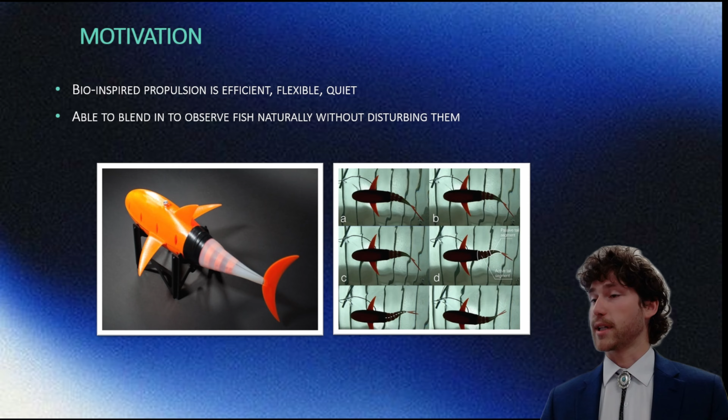I'm a senior in ocean engineering at the University of Southern Mississippi, and my senior project was optimizing thrust of a biomechanical fish. The motivation was, unlike traditional propeller-driven systems, bio-inspired propulsion can reduce noise, improve efficiency at smaller scales, and better replicate natural aquatic locomotion. This is useful for observing fish naturally without disturbing them.

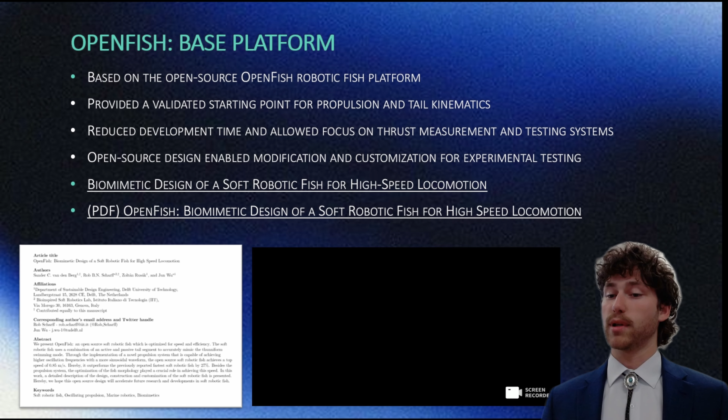The OpenFish project demonstrated realistic thunniform swimming behavior, making it an ideal baseline platform for evaluating thrust generation and tail performance. This video demonstrates the original OpenFish swimming behavior and highlights the realistic body and tail motion that inspired this project.

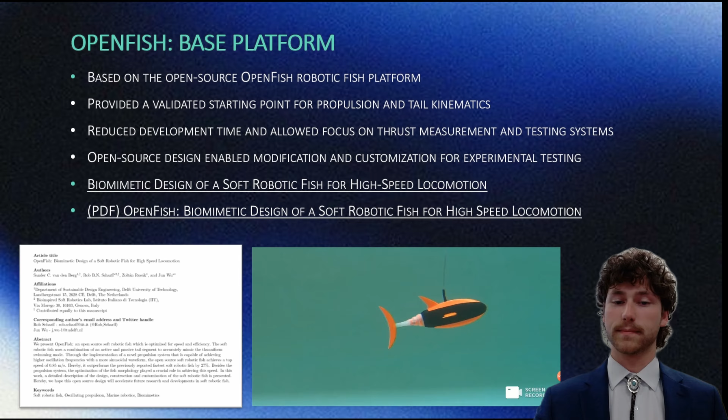And this is a clip of the paper on the left side of the screen.

The problem was, how do we accurately measure small and steady thrust forces produced by a flexible robotic fishtail? The primary challenge was separating very small thrust forces from noise, vibration, and mechanical interference while keeping the system simple and repeatable, as well as low cost, and allowing modular testing of multiple tail configurations and RPM conditions.

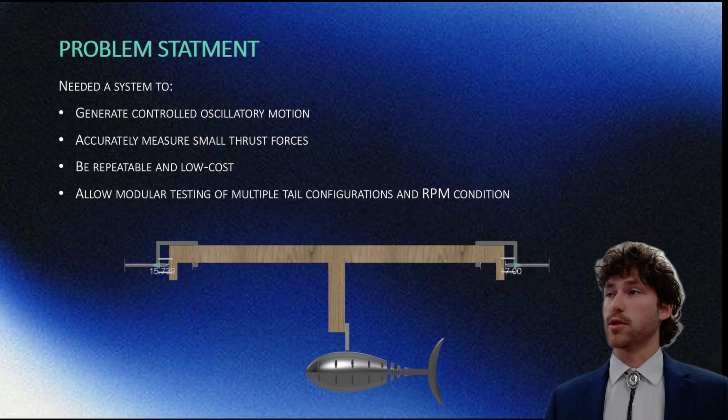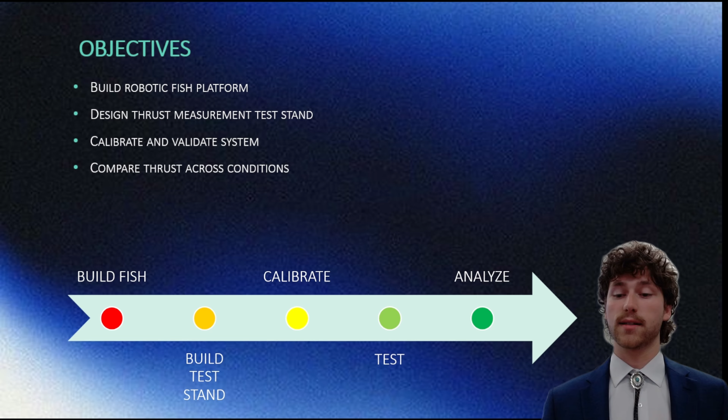The objective and overall goal was to develop a low-cost experimental platform by designing a thrust measurement test stand capable of quantitatively evaluating robotic fish propulsion performance and calibrating both systems to work in harmony with each other, then using them to run extensive testing on caudal fin configurations and RPM conditions, analyzing this data to see which performed best and created the most thrust.

Those two systems were the thrust measurement rig, which was designed to keep the fish stationary while measuring force output, and went through multiple design iterations to improve simplicity and accuracy, as well as the robotic fish, the propulsion device used to generate the thrust, tested under different RPMs and different caudal fin configurations. The integration of these two systems allowed controlled propulsion testing while directly measuring generated thrust forces.

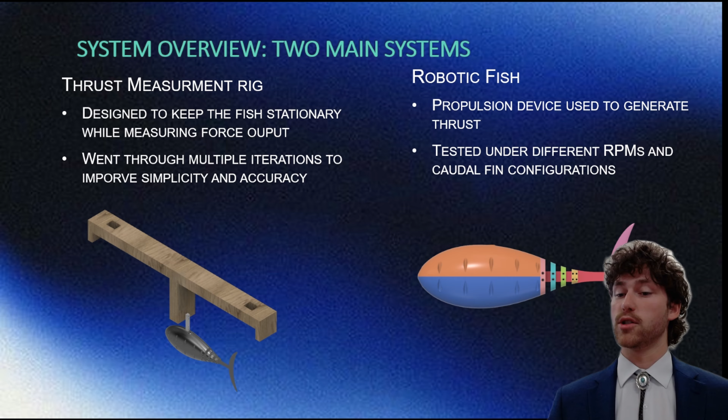For the rig iterations, the first one on the far left here is a sliding cart pushing against two compressive load cells. It would have a lot of moving parts and complexities. The second one in the center was the first vertical hanging configuration, which allowed easier access to the fish and a smaller tank. But the tail proximity to the bottom would have created undesirable wave reflections and interference.

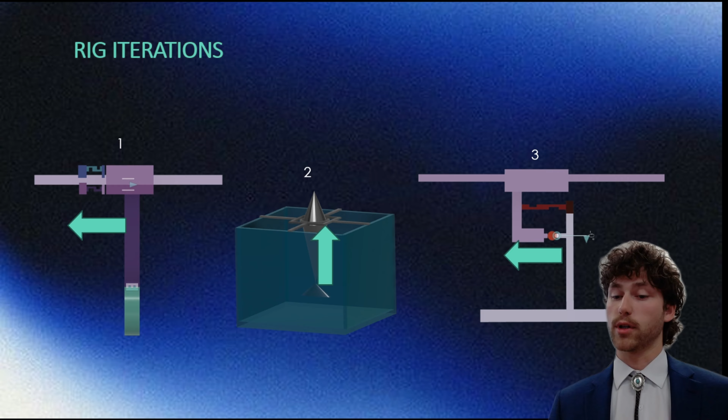Iteration 3 was a horizontal rig using a pivot bearing and a tensile load cell. This would function successfully, but introduced more unnecessary moving components. These early iterations helped identify major potential sources of measurement error, including unwanted moments, alignment issues, and mechanical complexities.

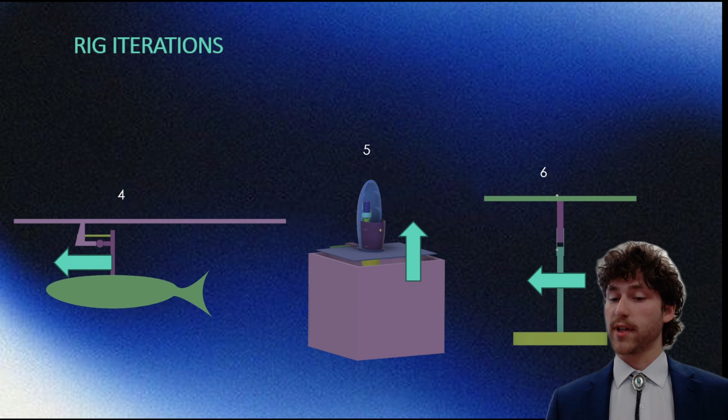Iteration 6 was the closest design to the final rig configuration. It used a moment arm connected to the load cell to convert bending into measurable force. Through iterative CAD designs, the design evolved towards minimizing moving parts and reducing off-axis loading effects.

For the final rig design, we used a simple wooden beam mounted across the top of the tank, and the fish was held stationary beneath the beam using a flat steel moment arm which connected the fish to the load cell. The load cell and the fish were both mounted using L brackets. The main advantage of this was a significantly simpler and more repeatable system, as well as cheaper. The main challenge with committing to this iteration was that the fish required complete waterproof sealing due to its full submersion. The final rig provided the best balance between simplicity, rigidity, accessibility, and measurement consistency.

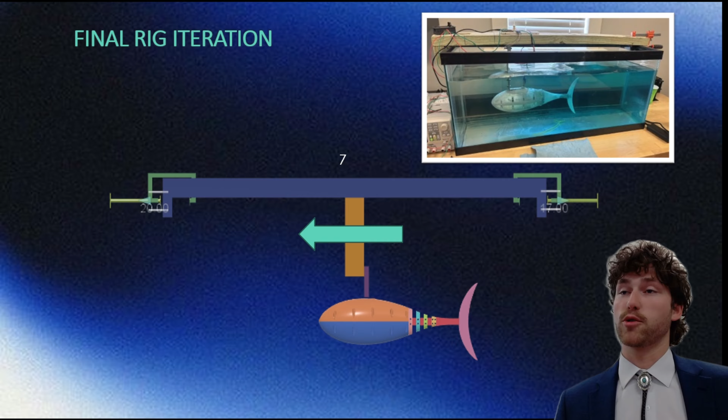As you can see in the photo, the load cell is on the top between the beam and the water, and the fish's caudal fin is fully submerged to have the least disturbance to the surface. The fish is also moved forward to not create unwanted reflections from the rear of the tank.

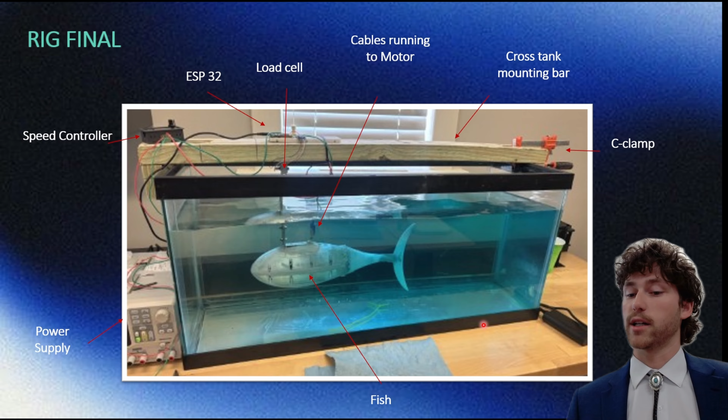The cables run from the power supply up into the speed controller and then down into the head of the fish to control the fish's RPM. The ESP32 communicated through a cable here to a laptop off screen. This final configuration successfully reduced unnecessary mechanical interference while maintaining accurate force transmissions to the load cell.

The other system is the fish, the robotic fish platform.

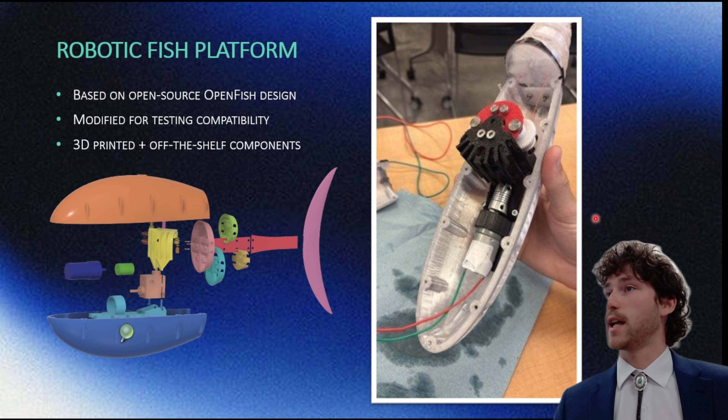For the propulsion system, it was a motor-driven gear system with cable-driven tail actuation that produced lateral oscillations. The figure shows the original CAD and the updated design in the photo here to show the differences that were made. The motor outputted into the shaft coupling, and then into a 90-degree gearbox with a 20-tooth gear at the top of that drove the two 50-tooth gears on each side here at the top photo.

With this, it pulled the cables that you can kind of see here in orange down the length of the tail, creating tail oscillations that generated forward thrust. This cable-driven system allowed compact internal packaging while producing realistic fish-like tail motion.

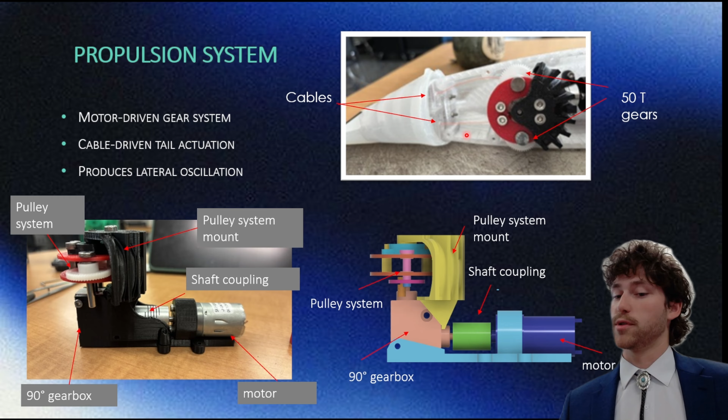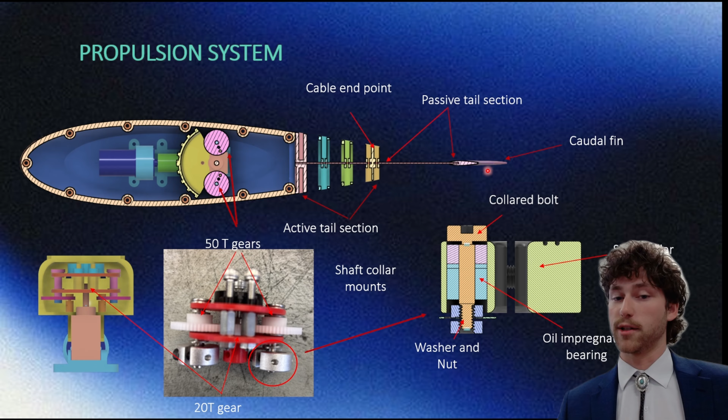The passive tail flexibility is critical for generating forward thrust. The water is redirected backwards at an angle to propel the fish forward, and the proper deflection produces realistic thunniform swimming motion. Thunniform locomotion is the minimization of head motion while maximizing tail-driven propulsion. While my fish is not free swimming, having the least head movement while attached was optimal for this study. The tail must balance the flexibility for bending and the stiffness for force transfer.

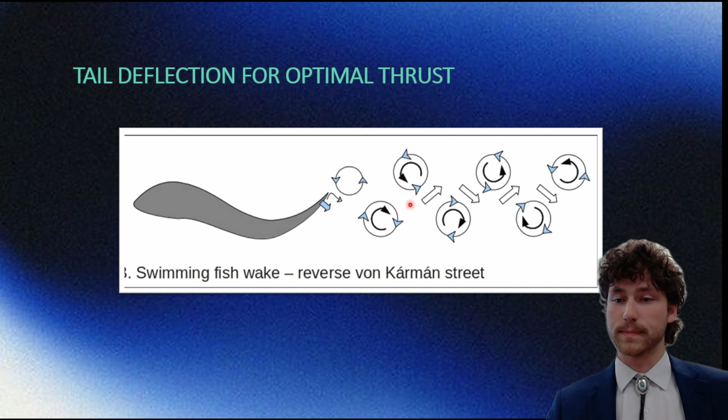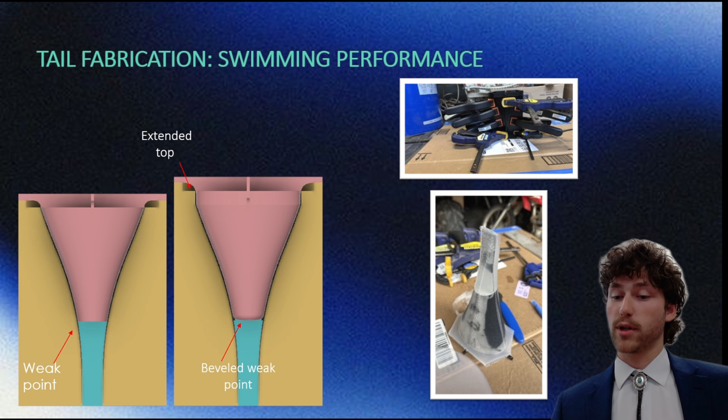That's because the top was increased by 10 millimeters to increase the surface area being sealed to the body of the fish. This would prevent pulls and rips from happening. The iterative fabrication improved the structural durability and the seal on the fish. Photo 1 shows additional silicone being applied to reinforce the weak point on the silicone tail version 1.

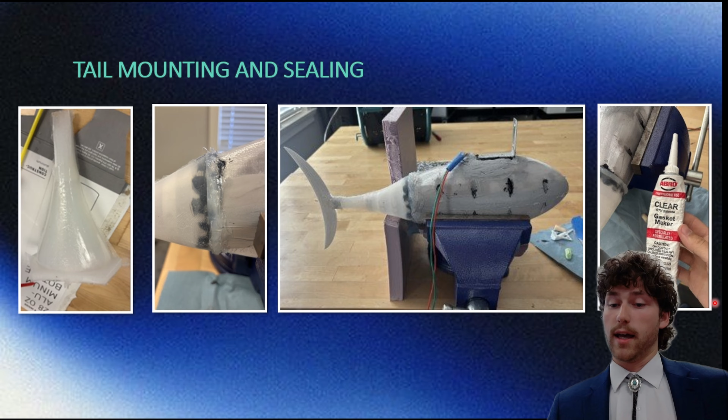And through experimentation and efforts to seal the tail onto the fish, I discovered liquid electrical tape, initially used for waterproofing, the black here in the second photo, did not adhere to the silicone tail, but did fill the gaps in the fish's body, as well as Flex Seal being used to seal the main body, the midline, and the wire entry locations, as well as the L bracket holes on the main body. The final successful seal between the silicone tail and the PETG body was achieved using an RTV gasket maker. Reliable waterproofing was essential because any leakage could damage electronics and invalidate long thrust testing.

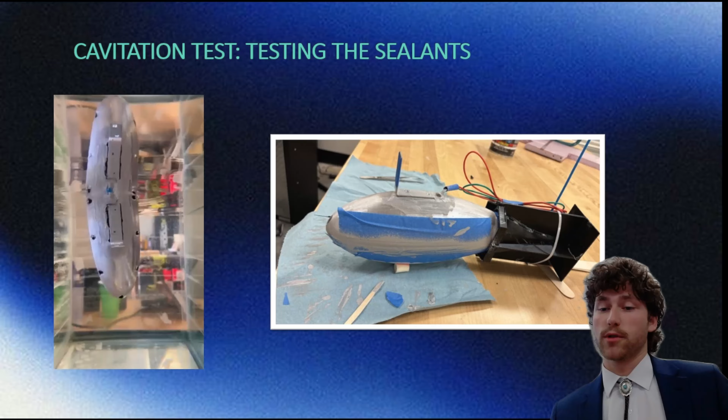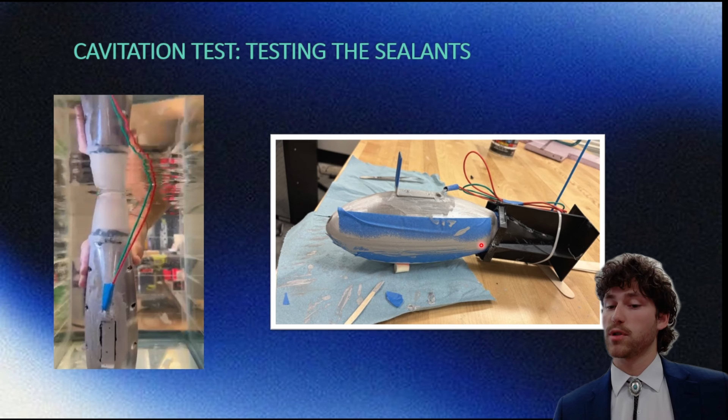After this, testing the fish in fully submerged water to see if it leaked or not. Observing for escaping air bubbles, which would indicate leaks. The successful test confirmed waterproofing integrity before thrust experiments. And on the right is a photo of the drying process for the Flex Seal on the main body of the fish. This verification step ensured the propulsion system could safely operate underwater during these testing sessions.

For the thrust measurement system, as the fish swims in the direction of the arrow against the load cell, it creates a bending moment in this section with a hole here. The Wheatstone bridge crosses the section, which is this, and the bending moment results in elongating or compressing these resistors. This creates a change in voltage across the Wheatstone bridge, which is proportional to the force being applied.

This is an output in analog, and then goes to the HX711, which amplifies and converts the data into digital, and it goes to the ESP32, which then runs the uploaded code of conversions and transfers the data to the serial plotter. From the serial plotter, we watch live data being collected, and it is recorded and then exported into MATLAB. From MATLAB, we process the raw force time data, then I use it to generate the plots and performance comparisons between testing sessions. These measurement systems enabled continuous real-time thrust analysis during the swimming experiments.

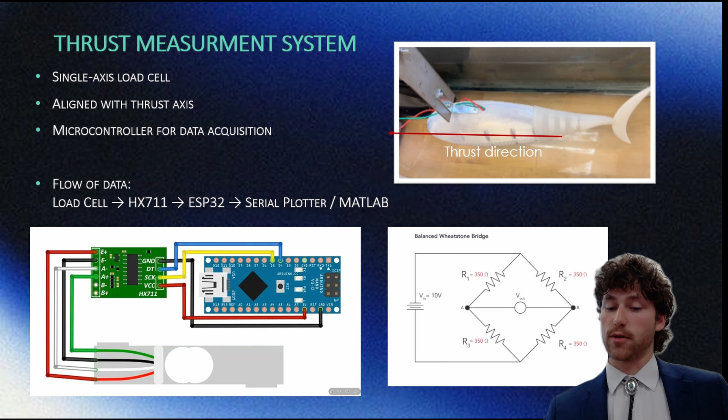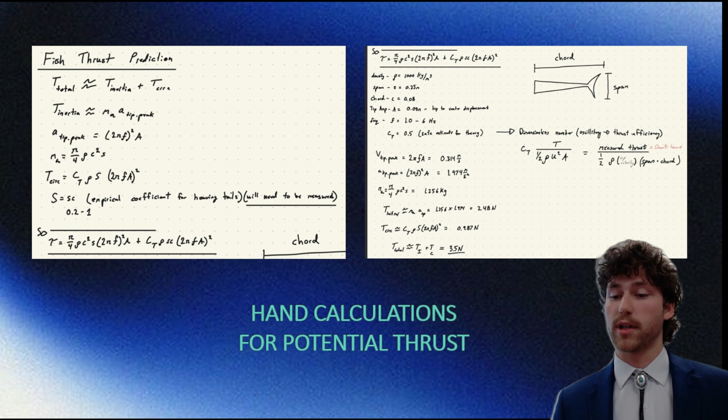Without the calibration, this data is meaningless. So I took the open source program that gave an output of grams from the load cell and added in the conversion to force, as well as adding in time steps to accurately show the force over time and be able to conduct swimming tests for equal lengths per test. The graph on the bottom right shows an example of force over time for a quick hand pressure test on the load cell to prove the code outputted in the desired manner.

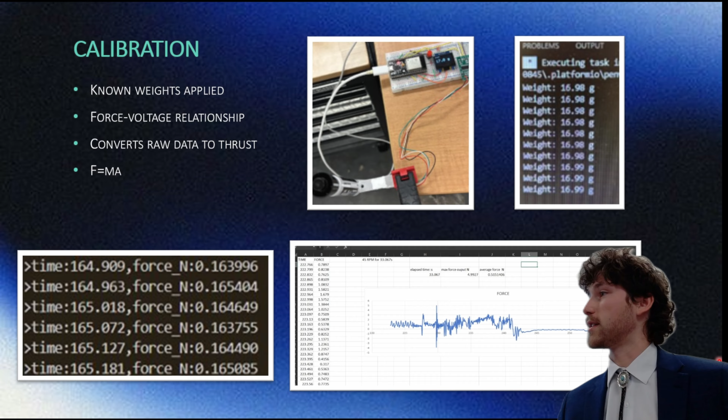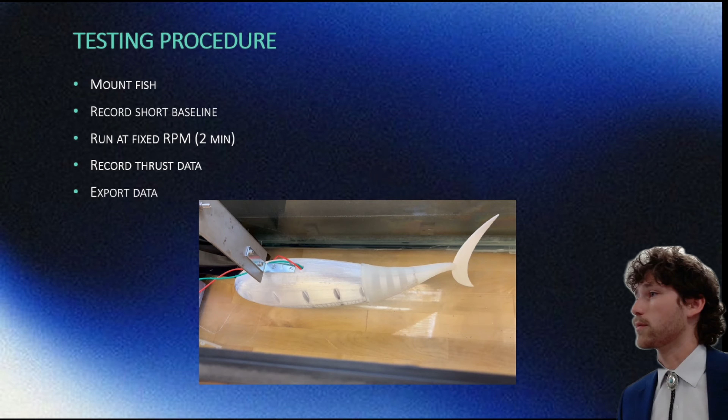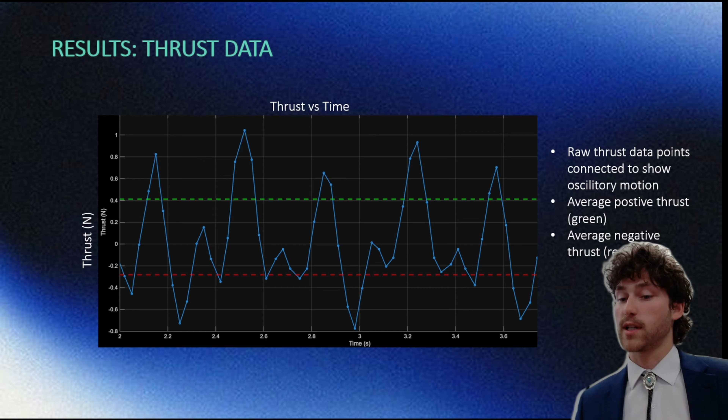This graph is a raw thrust signal plotted over time and connected to show the oscillatory force behavior. The green line is the positive average thrust, and the red line the negative average thrust, included for comparison. The periodic thrust pattern confirms successful transfer of oscillatory tail motion into measurable hydrodynamic force generation. And as I'll show you in the next slide, this particular graph is highlighting an inefficiency in force propulsion.

The caudal fin 1 test, pictured in the top right in the CAD version, was done at 450 RPM, producing strong forward strokes of about 1.2 newtons, but it also spends significant time in recovery and backflow motion. The close proximity between the positive average and the negative average thrust values suggests this tail configuration was not highly efficient at producing sustained forward propulsion.

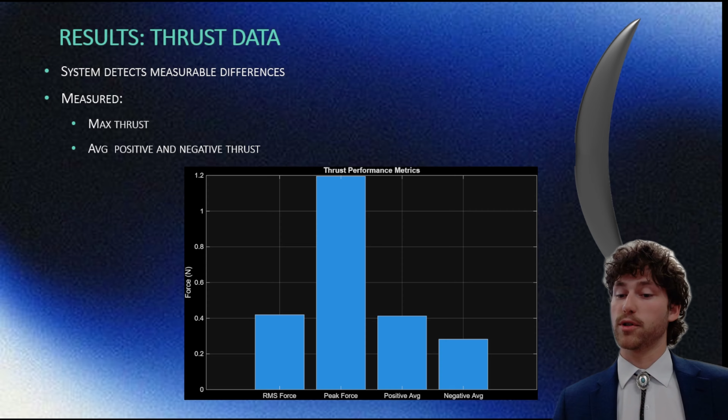Unfortunately, due to load cell failure, full quantitative comparison between all fins and RPM conditions could not be completed. However, qualitative flow visualization and tail motion observations still provided valuable insight into propulsion behavior. The direction the water is pushed is just as important as the amount of tail movement.

The initial fin design primarily pushed water side to side, and the larger fin generated greater drag on the passive tail section, creating an angle of attack that was more appropriate, and this increased the forward thrust movement. The larger caudal fin produced more realistic tail motion and redirected flow further behind the fish rather than primarily left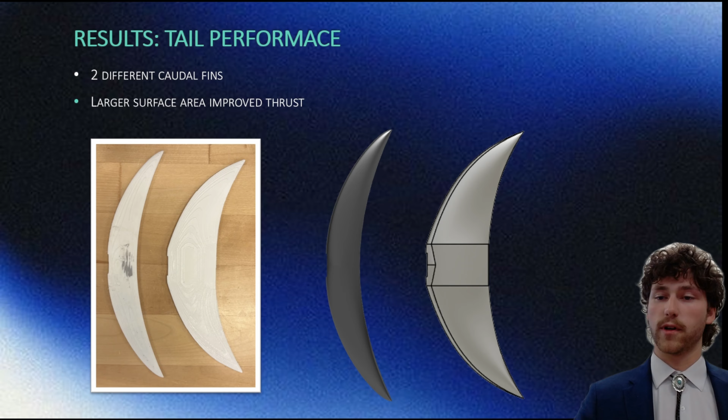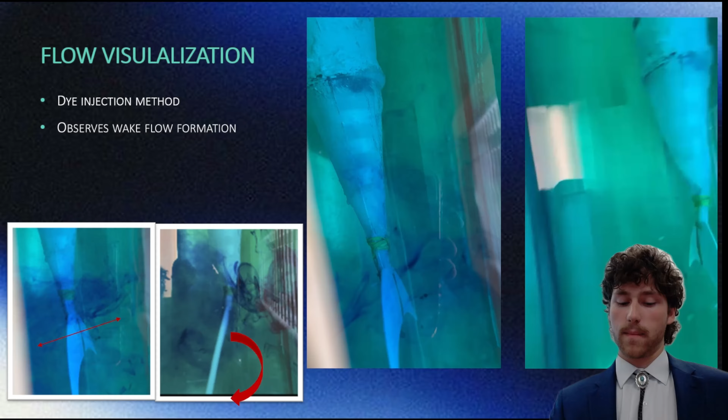This was the dye injection method used to observe the wake flow formation. The original fin configuration, dye primarily dispersed left and right, indicates energy loss to lateral flow rather than forward propulsion. And in the right video, the larger caudal fin configuration increases rear tail deflection, and the dye is pushed further

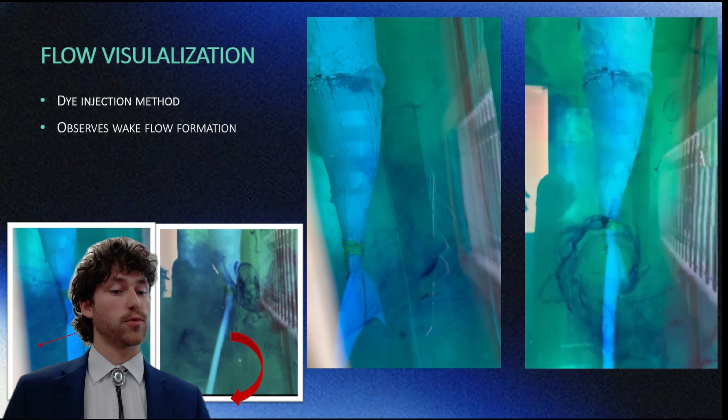downstream behind the fish. The flow visualization clearly demonstrates how tail geometry changes altered wake direction and likely improved the thrust efficiency. The larger fin produced a more concentrated downstream wake, indicating better momentum transfer and desired thrust direction.

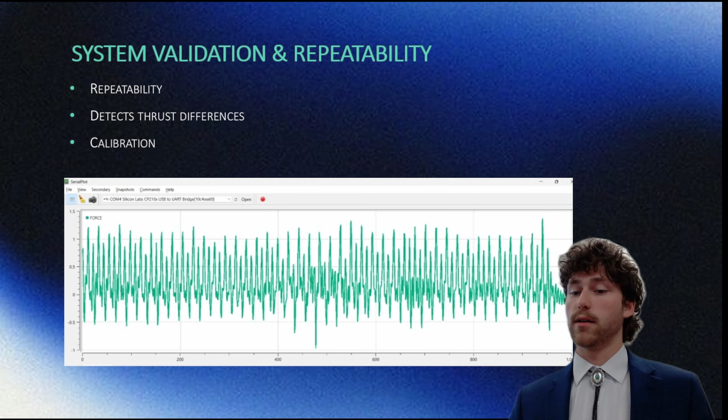As far as system validation and repeatability, although the data set was limited, the system successfully validated the ability to measure small oscillatory thrust forces from a flexible robotic fish platform, showing repeated peaks, oscillatory frequency, and a stable baseline noise in each of the iterations completed until a certain point.

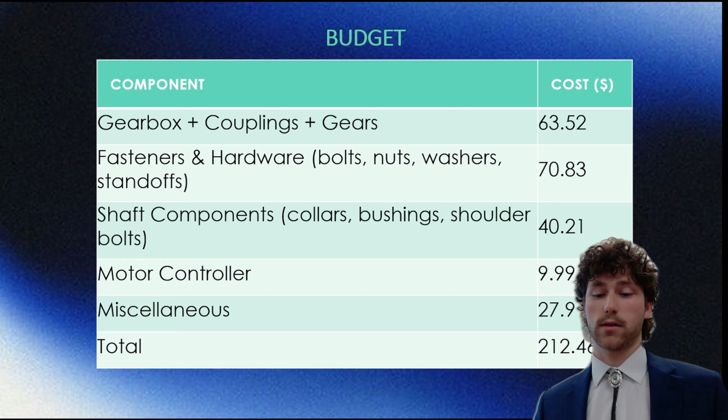For my budget, it was provided through the Ocean Engineering Laboratory. Thank you, Dr. Nunes. No outside or DCRA funding was obtained for this project, and the budget constraints influenced material selection and testing scope. Despite this limited funding, the project successfully produced a functional experimental propulsion testing platform at a relatively low cost.

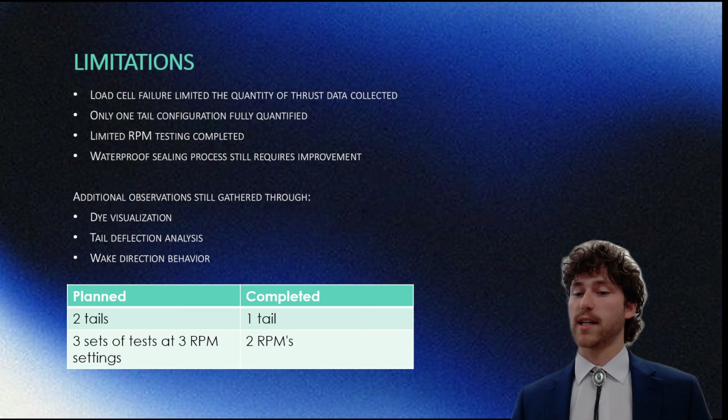The limitations: the load cell failure limited the quantity of thrust data collected. Only 1 tail configuration was fully quantified, and limited RPM testing was completed. The waterproof sealing process still requires some improvement, but some of the additional observations still gathered were the dye visualization, tail deflection analysis, and wake direction behavior. Although the numerical data set was limited, qualitative testing still provided important insight into propulsion performance and tail behavior.

As far as what can be improved, the deflection of the caudal fin to achieve thrust in the X direction, reducing noise and vibration in the measurements, and improving the alignment of the load path. Using a higher precision load cell, or one that doesn't break, and better waterproofing for future aquatic testing, as well as using some rust-resistant materials for the testing rig.

Future iterations should focus on improving both hydrodynamic efficiency and measurement precision simultaneously. Reducing mechanical noise and off-axis loading would likely improve the consistency of collected data.

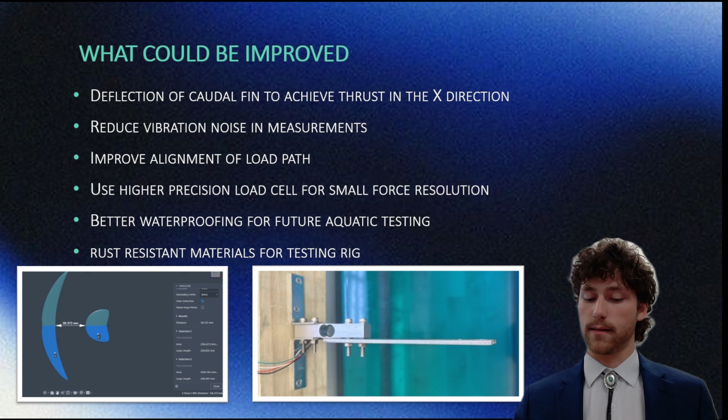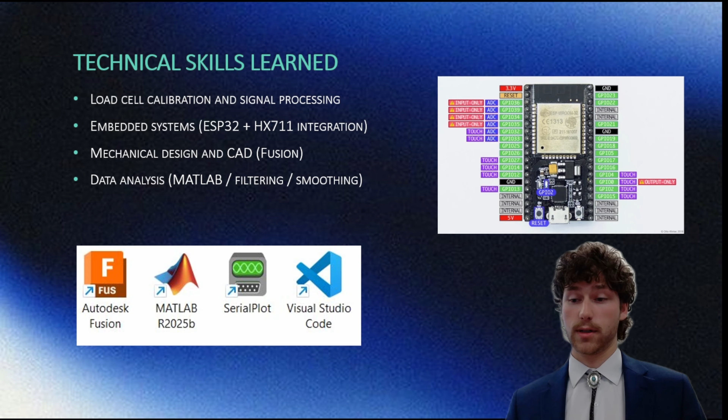For technical skills learned, I worked directly with load cells and calibrating programs, integrating with an ESP32 microcontroller and an HX711 amplifier for real-time data acquisition. I repeatedly redesigned components in Fusion based on testing feedback, using a serial plotter for raw data collection and MATLAB to process, smooth, and compare thrust data. This project combined mechanical, electrical, and software engineering into a single experimental testing platform.

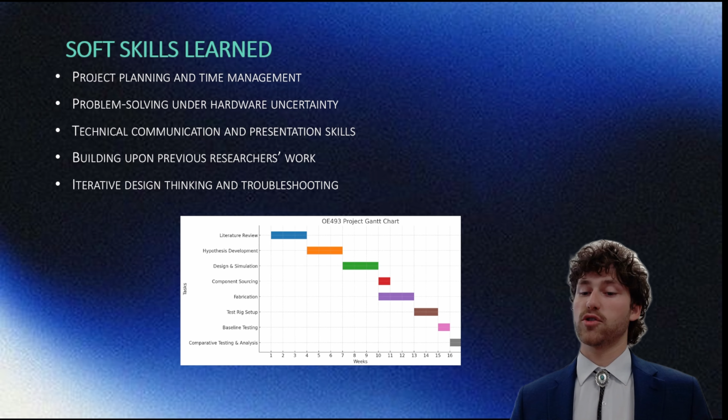For soft skills learned, seeing as we presented every week for at least 30 minutes, some of us for longer, I learned the importance of communicating technical systems clearly, both visually and verbally, especially when explaining complex mechanisms like the propulsion and thrust measurement system. This project reinforced how engineering research is often iterative, where each version builds off of previous work and gradually improves through testing and redesign. This project required balancing technical development, testing deadlines, fabrication challenges, and data analysis simultaneously.

One of the biggest lessons learned during this project was adapting to unexpected hardware problems while staying on schedule. A large amount of the project involved troubleshooting systems that I had not tested together before. And simplifying mechanical systems often improves their measurement quality more than adding complexity to them. This project also highlighted how experimental engineering rarely progresses perfectly linearly, and redesign is a normal part of development.

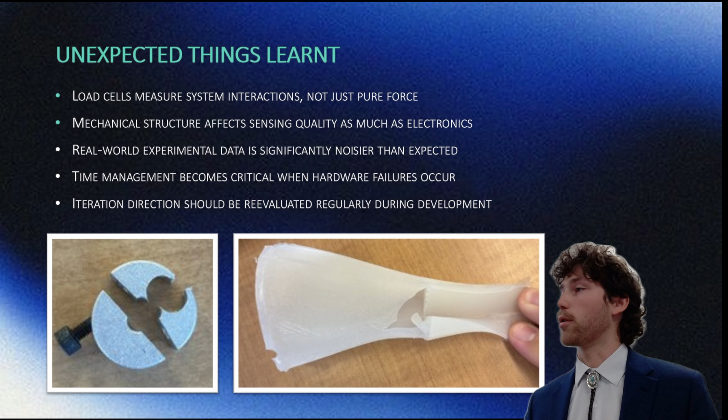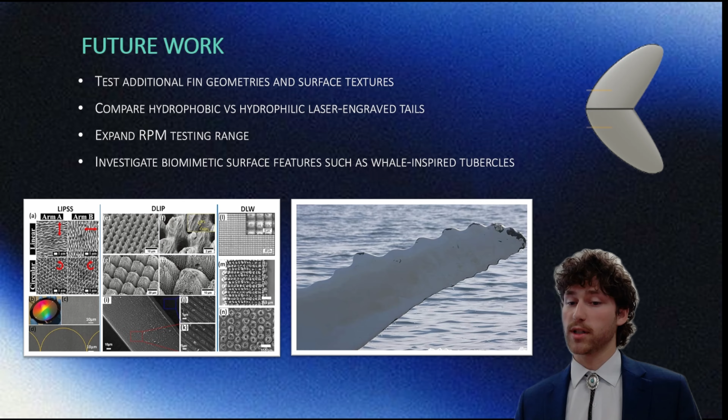The laser engraving and surface modifications were considered during the initial planning, but time constraints prevented full implementation during this phase of the project. The completed platform now provides a reusable foundation for future propulsion and hydrodynamic studies. Future testing could combine a quantitative thrust measurement with flow visualization to better correlate wake structures and propulsion efficiency.

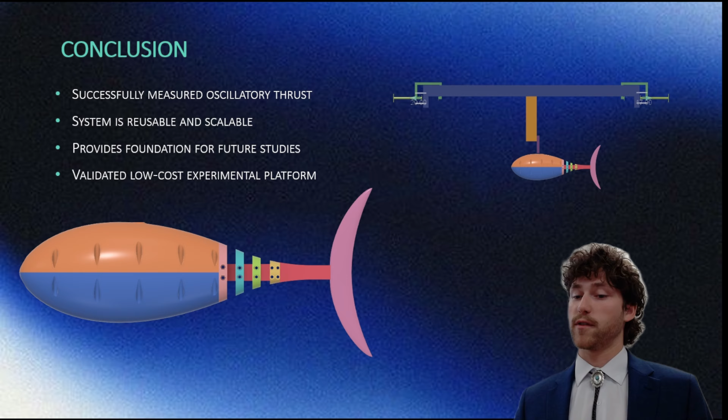In conclusion, the project successfully integrated mechanical design, embedded systems, fabrication, and experimental testing into a functional bio-inspired propulsion research platform. This work provided a solid foundation for future robotic fish propulsion studies and improved hydrodynamic optimization, as long as you replace the load cell.

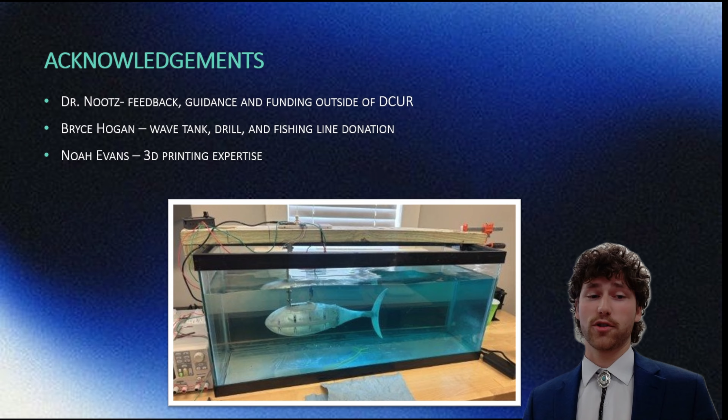So the first question is that it seems that your fish just moves so fast with the tail. So I was asking myself how fast a fish really moves its tail while it's swimming. That's probably why you were getting a lot of lateral movement, like you're literally doing fishtailing.

Yes. I meant to grab the other, but you saw the comparison of the two caudal fins. Both those videos were at the same RPM, 450, and you can tell the left one is doing a lot of lateral movement at that RPM. But this larger tail was at the same one, and it moves a little bit slower. It's the higher drag on this. I tested at other RPMs as well, but those are the most visually stunning for a video. At 450 RPM, this operates at about 2.4 hertz for both tails.

I would say that in reality, a fish tail follows a sinusoidal range. You should have tried to do that. Yes, that was the inherent hope and goal, but having this passive tail section bend is the closest I was getting to the sinusoidal direction, so having it look like that was the goal. This wasn't quite achieved.

And then you showed us the thrust, and you said that it's not very efficient. If you go to the graph. The bar graph? Yeah, no, next one. Okay. What does an efficient one look like? Unfortunately, the load cell broke, so I don't have data from this one to show you that.

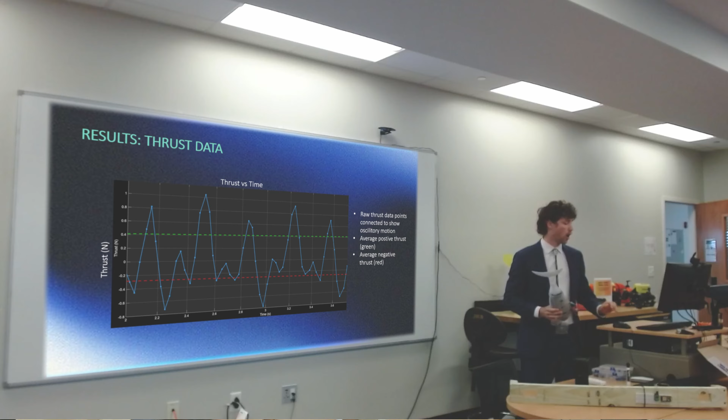I only meant inefficient as in highlighting how close the positive thrust versus the setback was, and just stating that they're too close for there to be much forward thrust. And that's because of the more lateral movement, as opposed to actually getting that angle of attack and pushing the fish forward. But I did not get a bar graph or another data set from that, unfortunately.

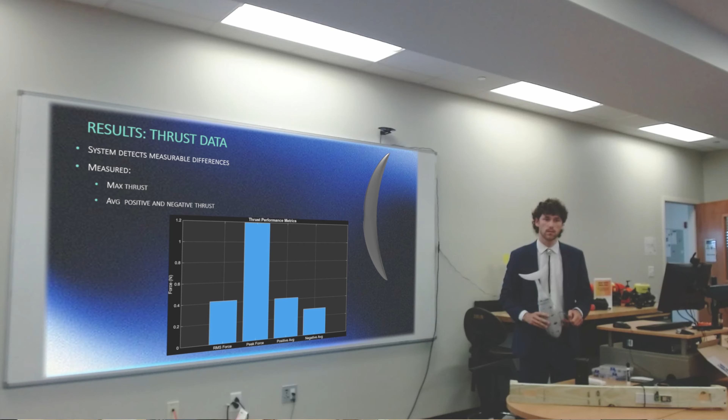Then again, you were missing that FFT analysis to show what frequency contains the oscillatory flux. Yes, sir. I guess future work should first get it done with an efficient process, and then go into reusable. Okay. Thank you.

So Leslie insisted. So my question is, since you couldn't measure the thrust for the second tail option, have you looked into the literature on whether you can back calculate the thrust based on your dye experiments and the size of the vortex that the tail is shedding?

Not recently. In the first semester, I looked into doing analysis with, I'm forgetting the term, but there's lasers, and you watch the vortex shedding, and you calculate thrust that way. But those lasers and equipment were very expensive. But maybe, yeah, I think so. But not recently enough to be able to answer the question now.

And also the load cell broke a week and a half ago, so I was behind, entirely my fault. And so when that happened, it was a bad time. Yep.

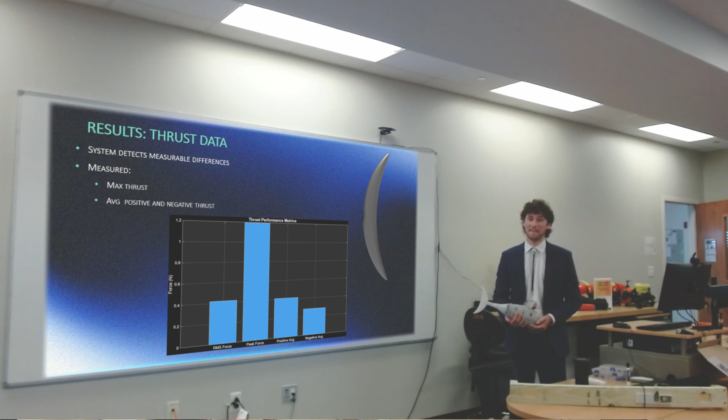So for your first tail, you said it seemed like it was having more thrust in the side-to-side motions as opposed to the forward-backward motions, which is what you would want. How would you pose measuring the side-to-side and forward-backward, either individually or at the same time, to compare and say this tail produces the most forward thrust as opposed to side-to-side thrust?

I would recommend not breaking your load cell, and quantitating it that way, following through and testing each caudal fin at the 3 sets of RPMs to see which one produces the most thrust. As far as without the load cell, doing vortex shedding math would work, provided time, of course.

Do you think it would be possible to fully eliminate any of the side-to-side thrust, or is there always going to be some amount there that you can only try to mitigate? Specifically with Giovanni, there will always be some side-to-side thrust because it's not creating that S, that sinusoidal motion, as efficiently as a real fish would. With a different fish design, you may be able to produce that S more efficiently and eliminate the side-to-side as much as possible.

But inherently, flapping left and right will create left and right thrust. It's just getting that angle of attack as you push to achieve forward thrust over the left and right thrust. And that's because the tail is hard on its own, right? The passive tail section is flexible, yes, but the actual hard part is inflexible, and that prevents that shape as well. Yes.

It also has that flexibility, no? No, you did the top part. Yeah, this is just a 100% infill basically of silicone. Right, yeah, that makes it pretty stiff. Yeah, and I can decrease the thickness of it to increase the flexibility for that section.

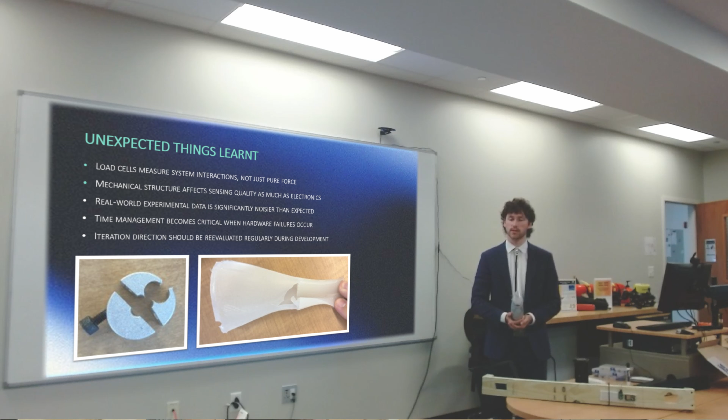Did you think about adding pectoral fins? I see you said you had a third — a caudal fin. Did you have any other ideas, like for a Thresher shark maybe? Originally I had about 5 different options, but the goal was to create one fin that worked the best, and then try hydrophobic and hydrophilic laser engraving to see which produced the most thrust. So I wasn't too focused on the fin shape itself — that's what I wanted to do, I just didn't get to it.

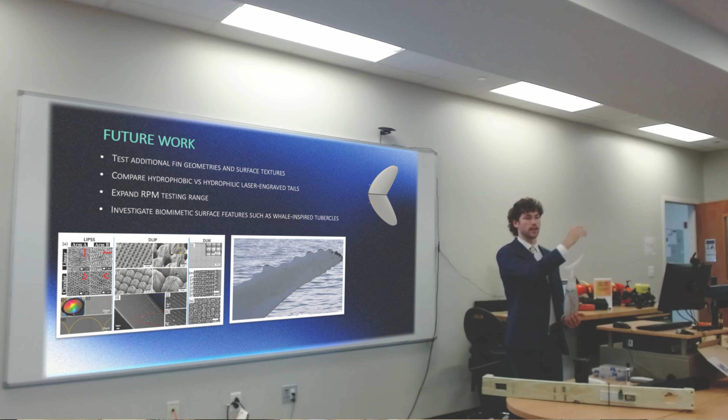Yeah, I just know Thresher sharks have that long tail. Is that the one where it's shorter and it's way longer up top? Super long, yeah. I would be limited by tank space, but that would be really cool to see. I didn't know if it could help with your thrust overall since they're a fast shark.

The original design that I had was a tuna's fin. Okay, that's not what this is, but it's similar. Yeah, I know what you're saying.

Charles, you had a question? Oh, what'd you raise your hand for? A marlin fin or something — okay, this was just saying.